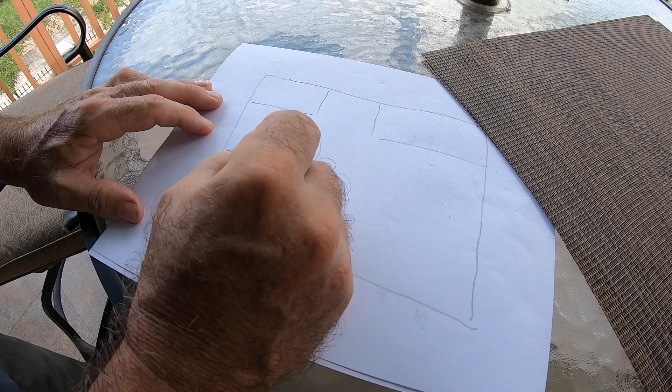I'm going to sit here with my blank piece of paper, and let's take a look at how we design this network. I'm just going to make a little rectangle. We're going to pretend this is Villa Feliz, and we have a room, a bedroom back here, a bathroom, another bedroom over here, a dining room, the patio, this is the sunroom inside, and we have the great room right here, and then the kitchen over here. I guess this shares a wall here, something like this. So anyway, in our kitchen is this area right here with the kitchen sink, and we have our little island right here. So we need access to different places.

Ness wants to be able to teach or work with her clients in the kitchen. So underneath the island, right about here, I have an RJ45 connection, Cat 6.

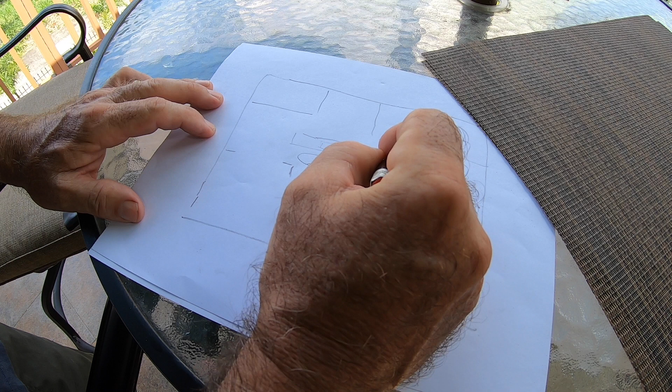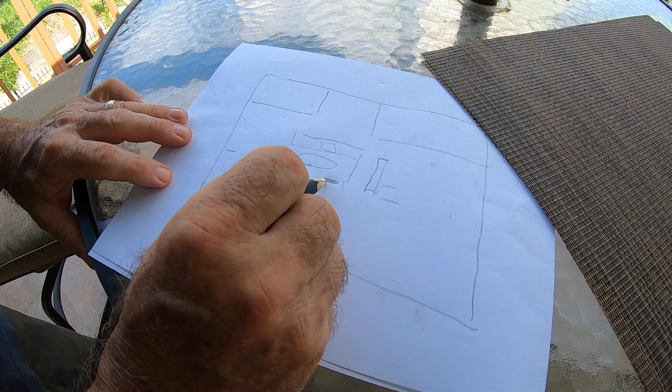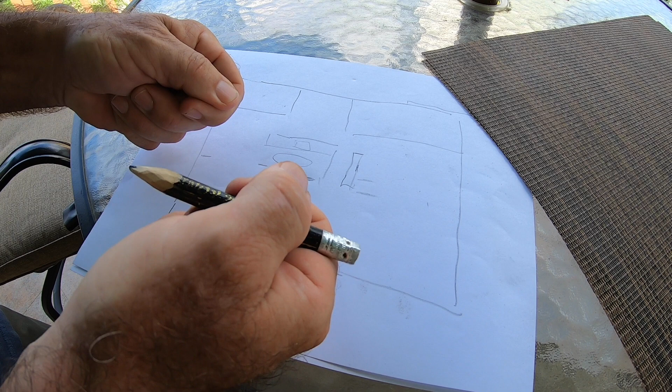Before we talk about all the places, let's talk about this little area right here, the laundry room. Over in this area right here, this is like a cabinet, and this is the control center of the entire house. Let's start from here. This is the control center, and we have our modem right here, this is our fiber modem that comes in from PLDT. PLDT is out here at the street on a pole, comes into the house, and goes into the back of this control box right here. Inside this control box, I can access everything. This is where we're going to do all of our patching and any of our troubleshooting. If we need to do anything, we have one place that we can do everything, and that's going to be right here. We'll talk a lot about this area in a bit.

But what happens, remember I said PLDT is out here, comes into the house, routes through the house to here, and then ends up right here on the wall near the kitchen. This is where our modem, our cable modem, is. Now, our cable modem also does Wi-Fi.

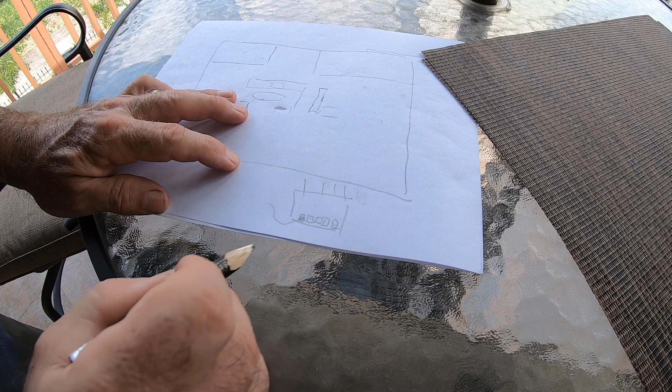It has both a router built into it, and it has wireless. The cable modem, we'll just make a little box that looks like this, like a router, with antennas, maybe 4 quad antennas on the back. On the back of it, it has some connections. One of the connections is going to be fiber, that little piece of glass that comes from PLDT, ends up inside your cable modem. Then inside your cable modem, built into it, is a router, and it has other connections that are not fiber. Each one of these connections, and it depends on the manufacturer of your modem how many you have, normally they have about 4. These are going to be RJ45 connections, your Ethernet connections that you can send out to other devices anywhere around your house.

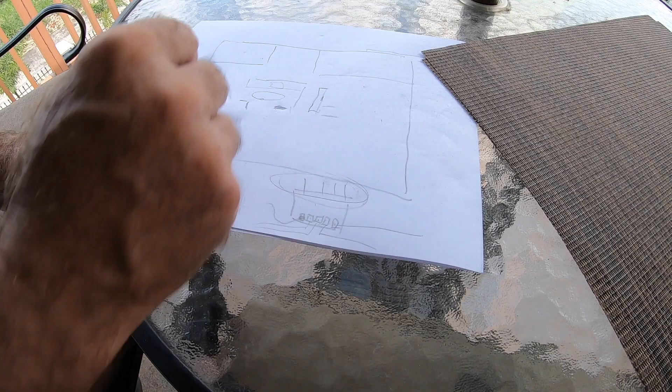So it has wireless too. These are antennas, and they give you like 2.4 gigahertz or 5 gigahertz connectivity throughout your house. These are just different frequencies, and we're not going to get into networking 101 today, but just so you know, that's what this does.

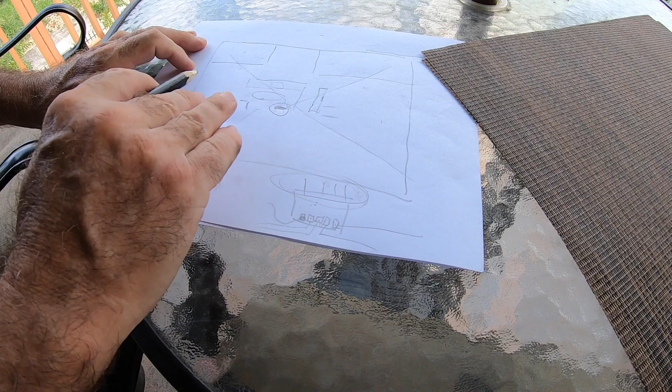So now this modem, which is sitting right here in the center of the house, that's very important. When you decide where you're going to put your cable modem that has Wi-Fi, you want the best place that gives you the best reach to all parts of your house, everywhere. So normally if you have 3 stories, on the second story in the middle, depending on how much concrete you have all the way around, that's usually about the best place you can put it. It will go vertical up to the floor above it, down to the floor below it, and give an equal amount of dispersion of your signal all around your house. So that's what we're talking about, placement. That's normally how you do it.

Now, if you are a network technician, you can do a site survey inside the house. You can set up a router or wireless modem in a certain place and walk around the house to see the signal strength. That's normally the best way to do it when setting up your initial configuration for your house.

So we have our connection from PLDT making it to this device sitting here in the center of our house, our fiber modem. Then you're going to want to take one of these Ethernet connections, one of these RJ45 connected to Ethernet cable, your Cat6 cable, and get it into a central point that you can split out to the rest of your house.

Now, if this area has a cabinet, this is probably the prime location to put it. But we don't have a big cabinet right here, so we made something very close—an enclosed cabinet over here. We took a signal off one of these connectors and ran it over to this area, which I call the control center, where we have a breakout patch panel.

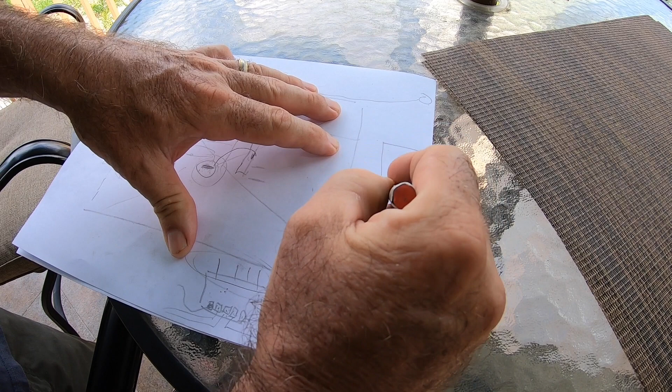And a patch panel is going to look something like this right here, with a bunch of RJ45 connections. You might have 8, you might have 12, you might have 24—you can buy any type of configuration.

On the back side of each one of these connectors, they're going to go to different places in your house. So this one, your rough-in, will go to your TV in the living room. A connection from the back of this patch panel will go to your bedroom television. The back one will go to, you get the point—they'll go to different devices all through your house that require Ethernet for network connectivity. We'll go downstairs and take a look at that in just a minute.

Now remember, these little wires on the back side of this patch panel—in the front, it's just a big hole open that you would plug your Cat5, Cat6 Ethernet cable into. Each one of these is only a path. There's nothing active about this; it's just a connection from here to your device inside your house.

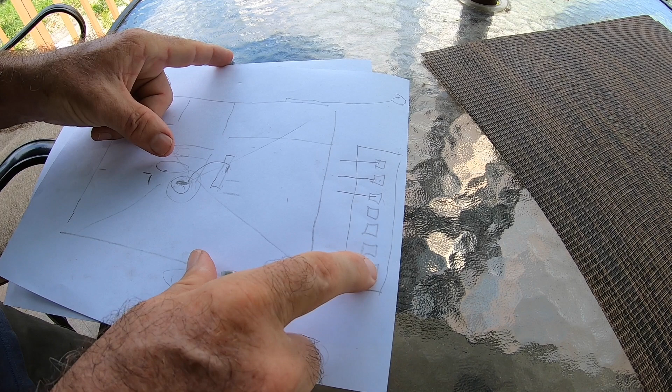Now from here, you have to get it over to your modem. How do I do that? How do I get all these connections? Say I have 8 connections here, but remember on the back of our modem we only have 4 connections. We're only going to use one of these inside, because we're going to take all of these and route them, connecting them up to a switch.

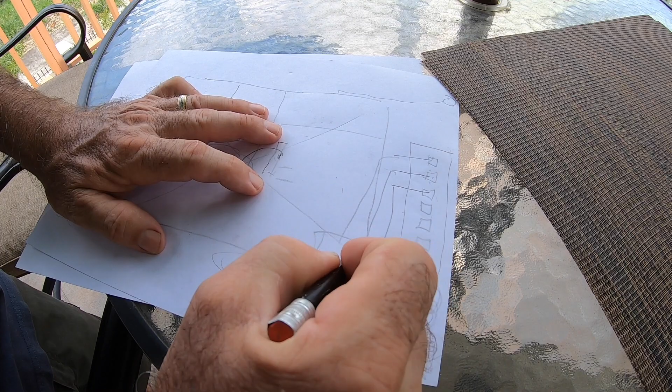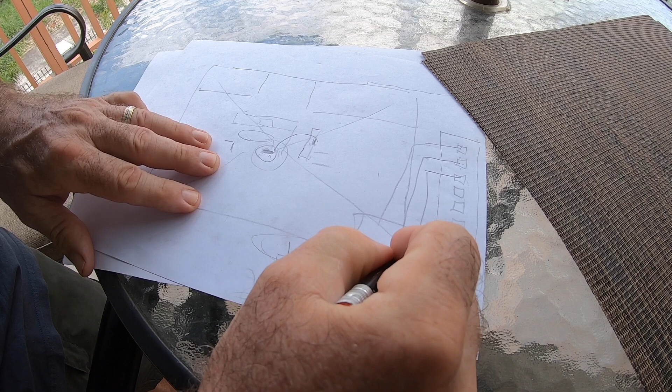And a switch can have 4, 8, 12, 24, 36 connections on it. This is going to act like a combiner—a switching mechanism that takes every device throughout your entire house and makes it come out on one connection. This is like your trunk, and it's going to go from here to one of those connections on the back of your router.

Now I know this all seems very confusing—extremely confusing, I bet, to some of you. Let's go downstairs and take a look at how it is, and I think it will clarify. I'll show you the path that will clarify how this whole network is connected.

Now when you are designing and giving your plan to your builder for your house, you have to find the location where you want your fiber modem or cable modem to reside. This is the one—this is the center of the house right here. You see we have the kitchen here, the great room here, and this is the center.

We have a floor above and a floor below, so this is where we decided to put the cable modem to give us the greatest dispersion of our Wi-Fi signal around the house. You don't see the antennas here because they're built inside this fiber modem. This fiber modem is both a modem, which modulates and demodulates the signal that comes in from PLDT or your internet provider.

And it converts it over into a digital signal inside your house to be able to use. You can see this is Wi-Fi, it shows that we have Wi-Fi inside here, and we have Ethernet. I think it's this connection right here, it shows our Ethernet. Also, the modem provides your telephone service, which shows our little telephone light, which is on and green, which is good. Green is always good, red is usually bad.

Okay, now let's go over to our patch panel. Remember, we need connectivity from here over that Ethernet cable to go to all the devices inside the house. How do I take one connection and connect it to all the other parts of the house? Well, this is how I do it. I have a patch panel inside here, and I have my handy dandy map that tells me what everything is hooked up to. So anyway, this is the patch panel.

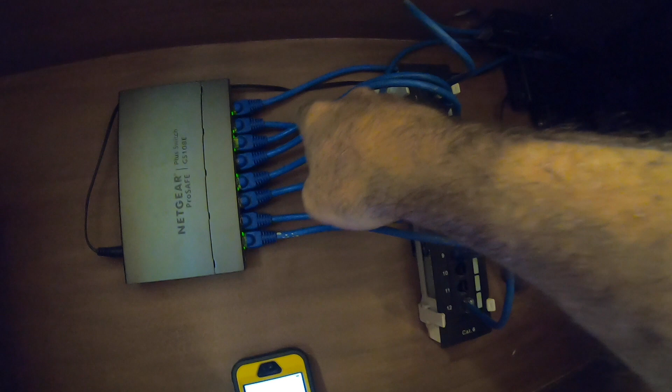So let's go in the opposite direction. Or we can go from this one. I can see on my list here, number 2, PLDT fiber modem. So on the patch panel, this cable right here, on the back side of this patch panel, is what is connected to the back side of the fiber modem that we just visited. So this is my point of entry right here, this one device, but I've got all these other wires inside here.

I need to take this one cable and make it reach out to all of these other devices, because on the back side of all these other cables on the back of this patch panel are all of our devices, all of our TVs, all of our smart devices. So what I'm doing is I'm taking this one and I'm splitting it out, going into a smart switch. And that's what this is right here.

This is a Netgear ProSafe smart switch. What this switch does is it takes one signal, this is the trunk coming in from PLDT, and it distributes it out on all these other connections, going back through the patch panel, and on the back side here it goes to all of those devices inside my house.

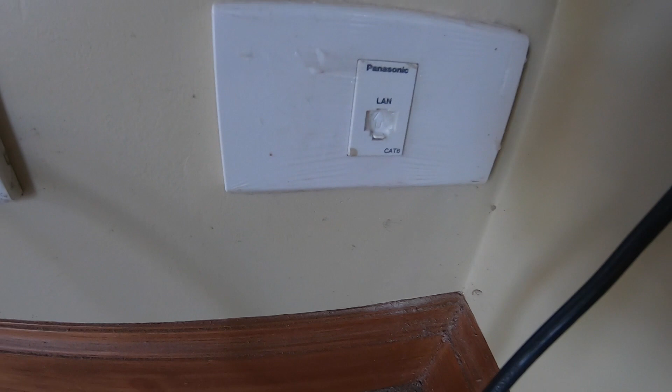So what you're going to need to do is get your contractor to take all your areas around your house, such as, let's take a look and see what we have. So to clarify, in the sunroom we have a connection right here, okay. That's an RJ45 connection that ends up on the back of that patch panel.

On the kitchen island we have, where is it? Oh, right here, you can see this one right here. This goes to the back of that patch panel. Downstairs inside the basement by the projector, we have a connection that goes to the patch panel.

Upstairs in the bedroom, behind the television, we have a connection. Well, it's not behind the television, it's actually here. You see this connection right here. This is a Cat6 RJ45 connection as well.

So you get the point. And the point being, anywhere inside your house that you have a smart device with the ability to connect up to Ethernet, Cat6, Cat5, whatever type of wire you have going through the wall via that little RJ45 connector on the end of your wire, you want to be able to have access.

That needs to be routed over to your patch panel. And what does the patch panel do for me? The patch panel is great if you have to do troubleshooting when you are trying to isolate a problem.

It's also really great if your contractor comes in and does what my contractor did. My electrician, when he first started hooking everything up, started daisy chaining the Cat 6 cables, and you can't do that. You can't daisy chain networking like you do electrical, and that's what he did.